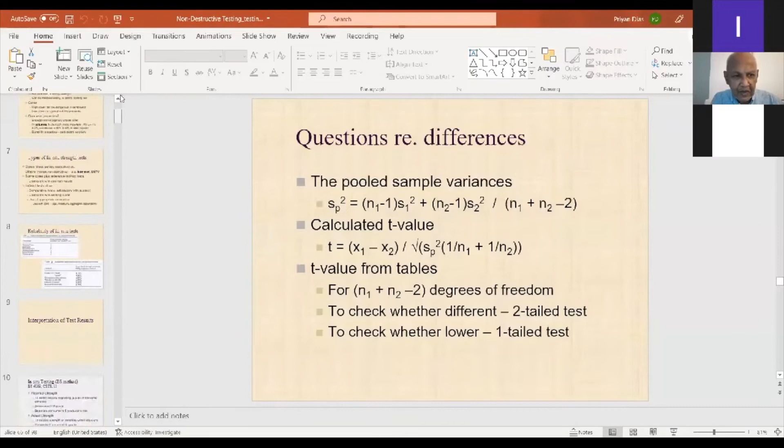So this is non-destructive testing and also assessment, meaning judging, right? This is part of an overall appraisal of structures. Non-destructive testing means the concrete is already in the structure, and you can appraise it at different stages. One very common case is if the cube test failed, as I mentioned in my last lecture, then you look at the concrete in the structure. But if there are changes of use at midlife, or when the structure is very old and you have to decide whether to demolish it or not, then also you can do non-destructive testing.

There are two broad ways of doing this. One is to actually sample the structure and get material properties, which is what I'm focusing on today, mostly with respect to concrete properties, although those concrete properties may not be the most important, and I will tell you about that. Then you take these material properties and check whether they are sufficient, or use those properties to do structural calculations. So that is sampling and testing the material properties.

The other approach is to completely forget about the materials and do some kind of load testing with an expected load, and then see whether the structure is behaving okay. Now, this non-destructive testing requires a lot of interpretation, and it is not as well accepted, there are sometimes disagreements, compared to, for example, something like a cube test.

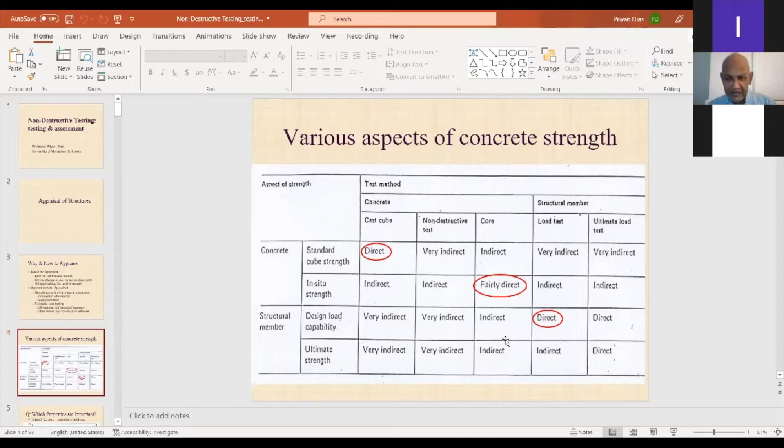Right now, I think some of you who have heard my lectures might be familiar with this slide. Okay, first let me use the pointer.

Now this is a simple slab. Those days we used grade 20 concrete also, and steel FY 460, with these bar diameters and spacing. If all these parameters are at their design values, let us say the moment of resistance is 14.35, and we divide that moment of resistance by 14.35 itself.

So the moment of resistance ratio is unity, with all parameters at these stated values. Now we can change one parameter at a time and see what happens to the moment of resistance ratio.

For example, if you think about the cube strength, instead of using 20, you make it half of that, that means 10 MPa, or you can make it double, that is 40 MPa. So you can see the cube strength has very little influence on the moment of resistance of a slab.

On the other hand, if you change the bar diameter, that will have a huge effect on the moment of resistance of a slab, or the depth of the slab, or the yield strength. So it is the steel properties mostly that govern the behavior of flexural members, especially slabs.

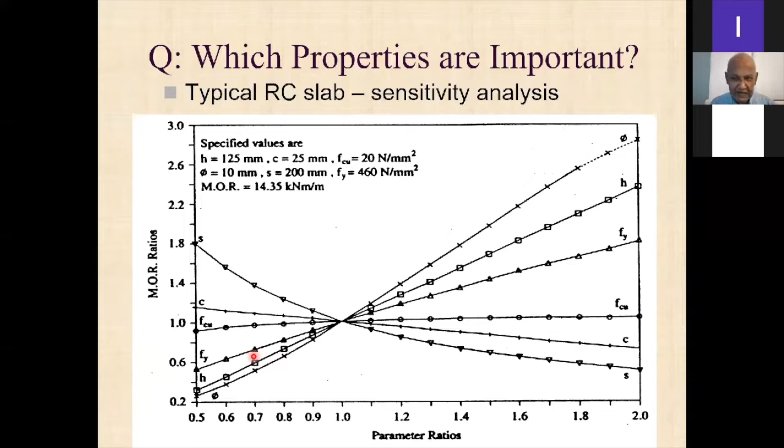Of course, where columns are concerned, the concrete is much more important, because concrete makes contributions of 69% and 53% as your reinforcement ratio goes from 1% to 2%. So concrete becomes much more important there, but much less for flexural members.

So when we are doing non-destructive testing, we should look at some of these other things also, steel properties and properties like cover, because cover will tell us, especially for structures that are mid-age or old age, about the durability conditions in those situations.

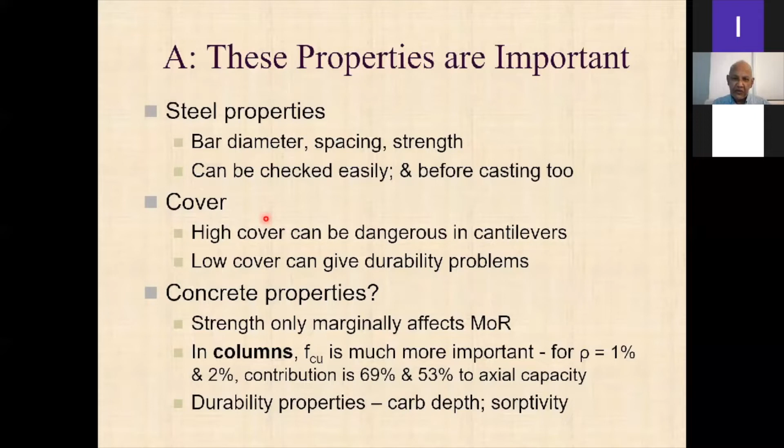So now there are different types of in-situ tests. One is you have cores. The cores are like the gold standard, because you're actually taking the concrete and testing the strength, which is mostly what we are worried about.

But there are others such as the rebound hammer test and ultrasonic pulse velocity, which give us a correlation with strength, so they are indirect tests. One way of doing it is to do some cores plus more indirect tests, and you calibrate with the core test results.

Sometimes many contractors want to get away, especially when the cube test fails, with indirect tests alone. This, of course, I strongly advise against, but in a comparative mode it is okay.

In other words, if you know there is a particular place in the slab where the concrete is satisfactory because the cube test has passed, and another part where the concrete is suspect because the cube test has not passed, you can do a rebound test and compare statistically whether there is a significant difference. I will go through that calculation.

I think some of you, sometimes your companies ask me to do this, or if there are existing cubes that have not been crushed yet, you can think about calibration with that. As a last resort, which I don't generally use now, you can use an existing correlation, because I'll tell you about some of the problems regarding those correlations.

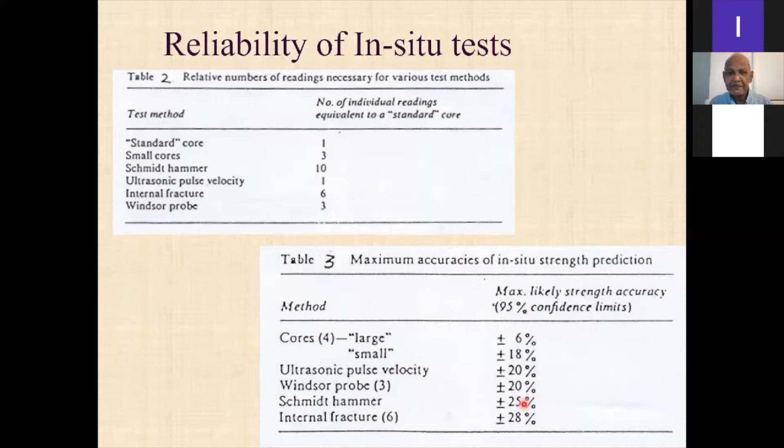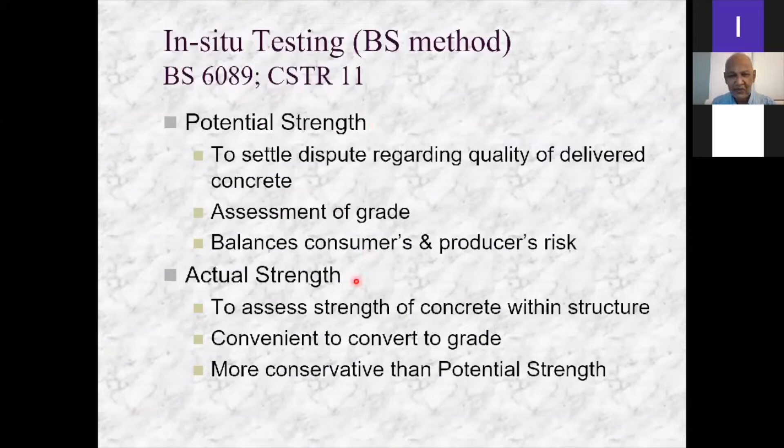Okay, so now we go to interpretation. Some slides have been blanked out because these things were done a bit earlier - Concrete Society Technical Report 11, BS 6089. In those days when you took cubes, there was an idea about potential strength and actual strength. We don't go to that anymore, but this is just in case you want to look at these slides. Typically potential strength means you are comparing the concrete in the structure with concrete that has been delivered. You cannot expect the concrete grade to be the same in the structure as in the cube, because the cube is well cured and tested under lab conditions.

We normally use a safety factor for that also. We know that the concrete strength in the structure is the FCU value divided by 1.5 - the partial safety factor for concrete materials. So if we get, say, 3 cores from the structure, and there is a dispute about the concrete that has been supplied, we take that mean strength - this is how it was done in those days. The new way of doing it is a bit different, I'll tell you that. So the mean strength you multiply by 1.3, and that is called the potential strength. If the potential strength is greater than the characteristic strength, we say the compliance is met. If it is less than 0.85 times the characteristic strength, the compliance is not met. In between, of course, there is some area of uncertainty.

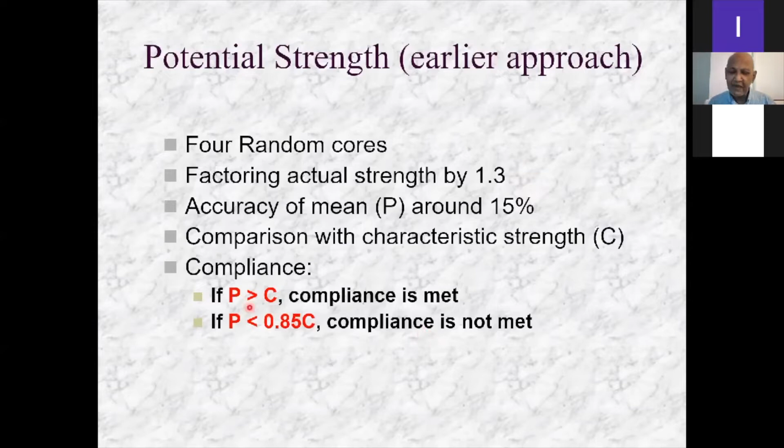Okay, now this is a bit of a different scenario - this is the new Eurocode. First of all, they say that the in situ strength - earlier we had this 1.3 factor, but here it is slightly different. If you take 1 divided by 0.85, you don't get 1.3, you get something like 1.17. So this is a bit more conservative. And it also gives you a table.

So these are the standard grades, depending on whether it is a cylinder or a cube. Let's say this is grade 20 cylinder, grade 25 cube - that's the way it's mentioned. So in situ, you take 0.85 of that. So the grade you expect in the structure is only 17 if it's a cylinder strength, or 21 if it's a cube strength. That is used in the interpretation of these results.

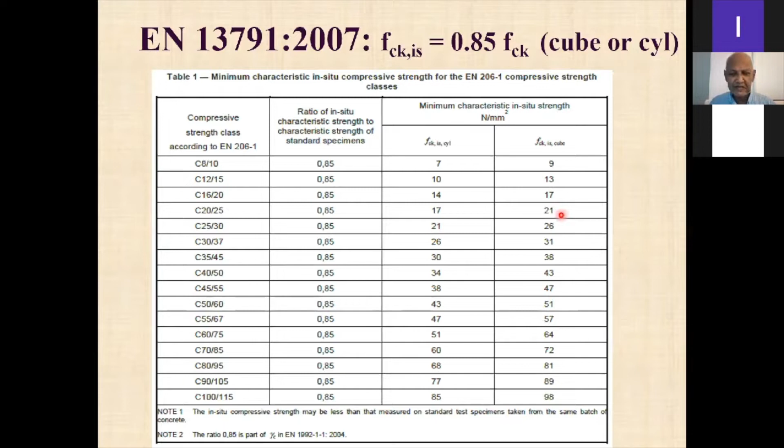So in an old structure, you can either use cores or a calibrated method. If you use cores, you have approach A and approach B. Approach A means you are prepared to take 15 or more cores - very few people want to do that. I remember many years ago we looked at the Puttalam Cement Company buildings, there was a major renovation, and I think we took a lot of cores there, but unfortunately this code was not available then, so we did various other things.

Now, if you have fewer cores, 3 to 14, you can use approach B, but it will be more conservative - you can get a higher in situ grade if you use approach A instead. So if you spend more time, effort and money, you can get a better result. If you use less time, effort and money, you have to be more careful, and the estimated strength will typically be less than if you use the other approach. Similarly, in a calibrated method, we use alternative 1 and alternative 2 depending on the amount of cores or whatever is being used.

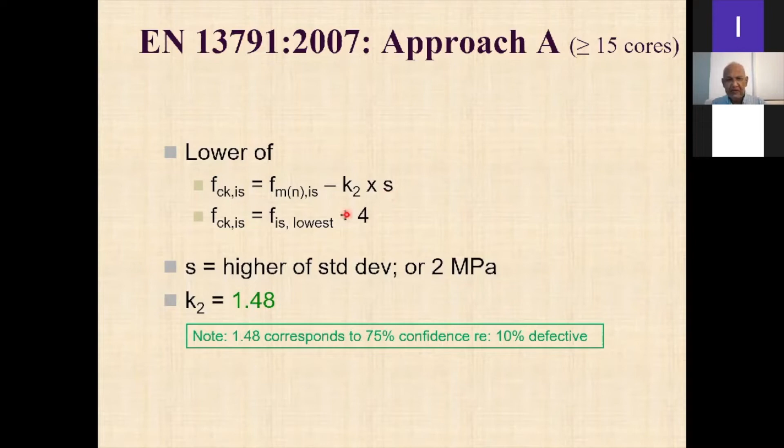And of course, the in situ characteristic strength should be the lower of this one or this one. This S value, you can actually calculate, or if it is less than 2 MPa, you have to use 2 MPa. The K2 value used is 1.48.

Now if you have less than 15 cores, the formula is similar to what you have there. Once again you find the mean strength, and you subtract. Now the standard deviation is not there because there aren't enough cores to find the standard deviation. Depending on the number of cores you take, between 3 and 14, your K value will be very high here, but less there.

So this will be the computed in situ characteristic strength. But also, if the lowest strength plus 4 is smaller than this, then you have to take that one. So, like I have said before, if you take a less number of cores, because of these K values, the in situ strength will be underestimated.

So it depends. You can take a fewer number of cores and get a smaller in situ strength, or you can take 15 cores and get maybe a better in situ strength. It depends on what you want.

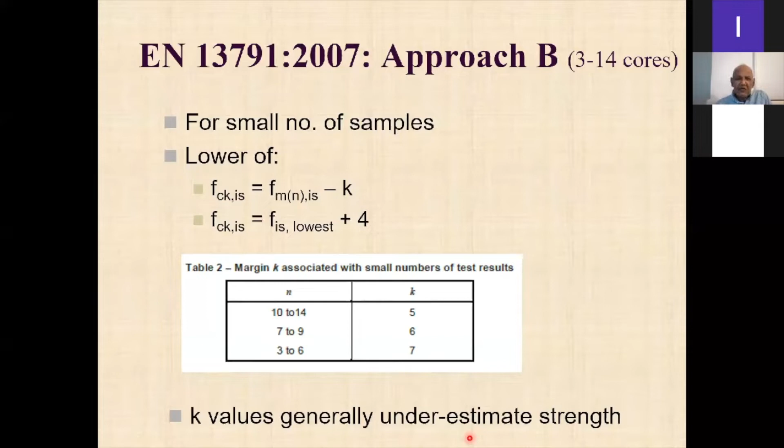Okay, so this is an example. Let's see how we implement this. So this is not a cube test, this is a core from which you get an equivalent cube strength. There's a way to convert that, and I might be able to cover some of that also.

So this is the concrete equivalent in situ cube strength. The core is a cylinder, but you have to convert that to an equivalent in situ cube strength. So you have a series of results here, you can see there are only 7 results. This is the mean, and the minimum is this—out of all of these things, the minimum is that.

Now, what is the in situ characteristic strength of this? It's the mean in situ strength minus 6. Where do I get 6 from? If I go up there, n equals 7, so from 7 to 9, the K value will be 6. So 21.49 minus

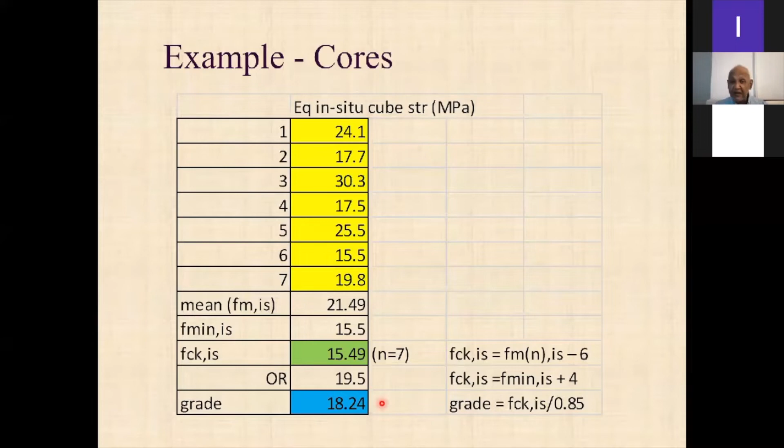Okay, so this is how to get an in situ strength, in situ characteristic strength, and then convert it to a grade in case you want to use it in a design calculation.

Now these are alternative, indirect tests that are correlated with cores. So there are these different kinds of tests that can be done. Here also for the correlation, you have to have not 15 but 18 cores, a large number of cores. So actually this is useful, but to do the correlation we need 18 cores, so maybe not many people might be interested in doing this.

This is where I finished, I think. So once again, you have to follow this, a similar thing as what we had earlier. Earlier, the minimum standard deviation was 2 MPa. Now it is made 3 MPa. But unfortunately, you have to get a regression,

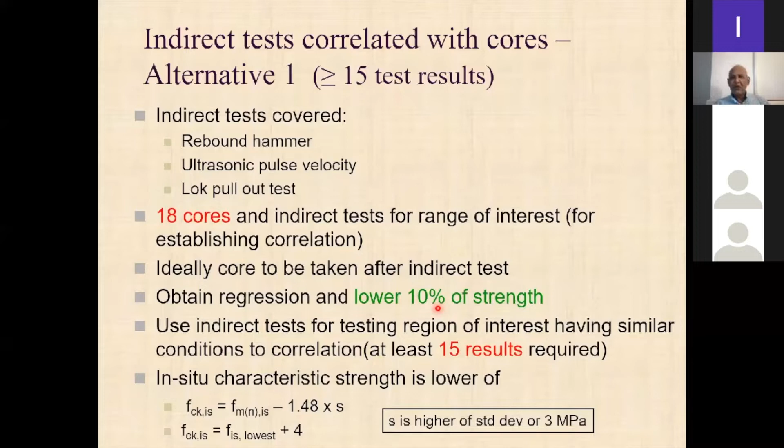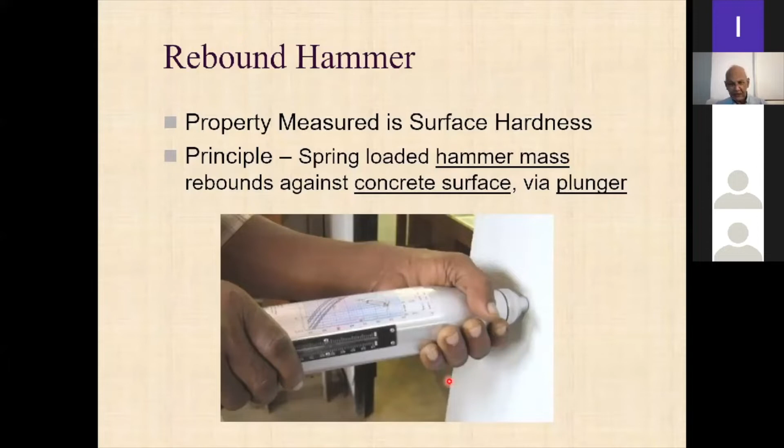Okay, this is how you do the calibration. Right, now before we get to that, I will just show you some straightforward things and these different types of indirect tests that are available. So in a rebound hammer, what you actually measure is surface hardness, you're not measuring the strength.

Typically, you have to take 9 to 25 readings over an area of 300 millimeters by 300 millimeters. Typically, people take about 12 readings.

This result is influenced by the hammer orientation, whether it is horizontal, vertically upwards, or vertically downwards. There are also factors like age, surface carbonation, moisture condition, and coarse aggregate type. All of these things will influence the calibration.

That is why I am not happy when people say they have taken rebound hammer readings and used a calibration chart provided by the rebound hammer supplier. All of these things will be different, right? So actually, you should try to ensure that the surface is dry.

But then, of course, you have to look at things like how old the concrete is, what the coarse aggregate type is, and the hammer orientation. The difference, of course, we can rely on what the rebound hammer supplier says, but everything else will be different.

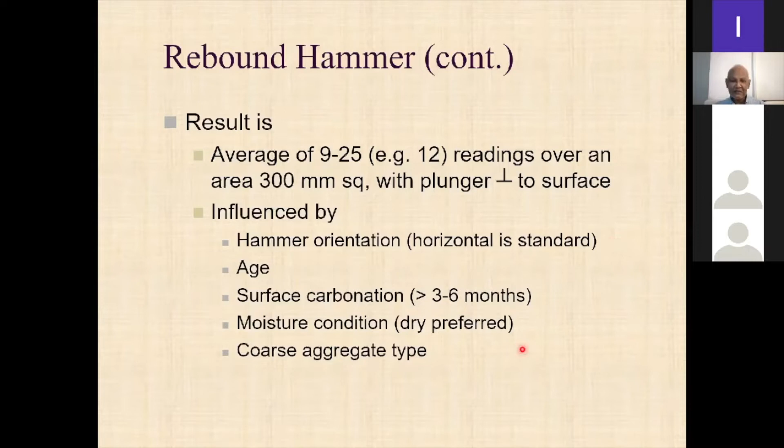So now let me give you an example. This is from the early days, many years ago, when I just started off at Moratuwa University. We did rebound number versus cube strength just to see, and this is published in The Engineer. You can see that the cube strength varies with the rebound number.

Now it so happened that I thought you should have a straight line like this. Now I will show you what the Eurocode correlation is. It's not a straight line.

But the other thing I want to show here is that we had some cubes that were wet and some cubes that were dry, in order to get a bit of a spread of strengths also. Now, this correlation line is drawn only between rebound number and cube strength for the dry cubes.

Now, if you take the wet cubes, they have a range of strengths, but a very small range in rebound number, and the rebound number is fairly low also. Which means that strength has no effect on the rebound number in this case.

So the story from this is, if you are taking rebound hammer readings, you have to ensure that the surface is dry. If it is a wet surface, then the rebound number will only be a reflection of that wet surface, the hardness of which will be reduced because of the moisture.

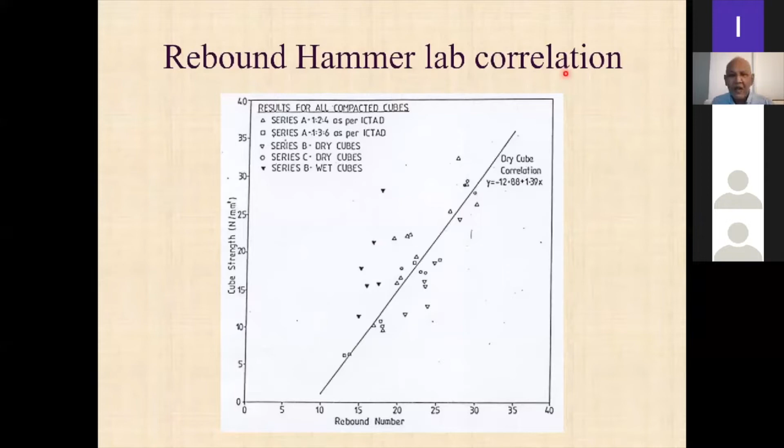Now, here you do in fact find a straight line in the Eurocode. There's a slight change here, the inclination changes slightly.

So what we are doing is, if we are getting a correlation between rebound number and strength, we have to get that correlation using 18 cubes, and we have to find the difference between each one of those points and this line, so that we draw a line that is parallel to this. We cannot draw a straight line just using these points.

You might think that we get a set of points here and just draw a straight line through that. No, you cannot do that. The code forces you to maintain this slope, this shape. That is the idea behind the correlation between this indirect test and the strength.

So your age, your carbonation, and all of those factors will be different. That's why it's encouraging you to do this correlation, but this shape is only shifted vertically by a set amount. This slope remains constant, this slope remains also constant.

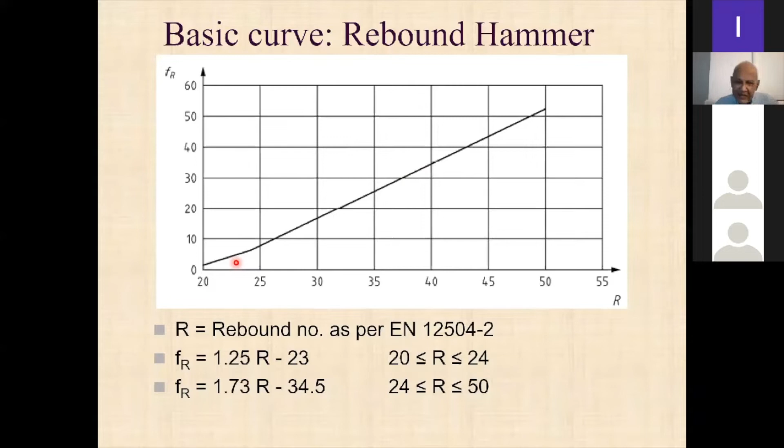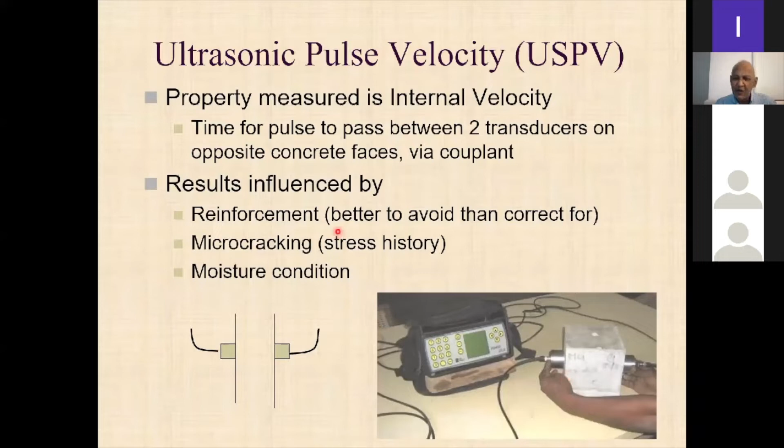Now, where ultrasonic pulse velocity is concerned, you have these different things, and the pulse passes between two transducers. So the results are influenced by things like reinforcement, microcracking, and moisture condition, and the moisture condition is very important.

Now, in those days, people thought that the relationship between strength and this pulse velocity was given by this logarithmic expression. So pulse velocity is on a natural scale, and cube strength is on a log scale.

So this is from a very old paper, I think, not one of mine. Let's say you have a wet cube strength here, and concrete gets put into a structure. So the actual core strength will be here. There will be a drop in strength because we cannot expect the strength in the concrete to be actually the strength that is in the lab. So there will be this drop in strength because of that.

But separately, if you do a lab correlation, you will get something like that. And this loss is the pulse velocity difference from the strength loss. In other words, this is the lab value, and this is the strength in the structure. So that pulse velocity loss is because of the change in strength.

However, in the structure, now when you do the pulse velocity, you are doing it under moist condition, so the pulse will travel fairly quickly through the moist concrete. In the structure, especially if it is something like 12 or 15 years old, you will have very old concrete, and I am assuming you're doing it when it's dry. So then there will be a loss in the pulse velocity because of the desiccation, because the water is not there compared to what you have here. So this is called the desiccation line. I think this is from an early paper from a fellow called Thompson.

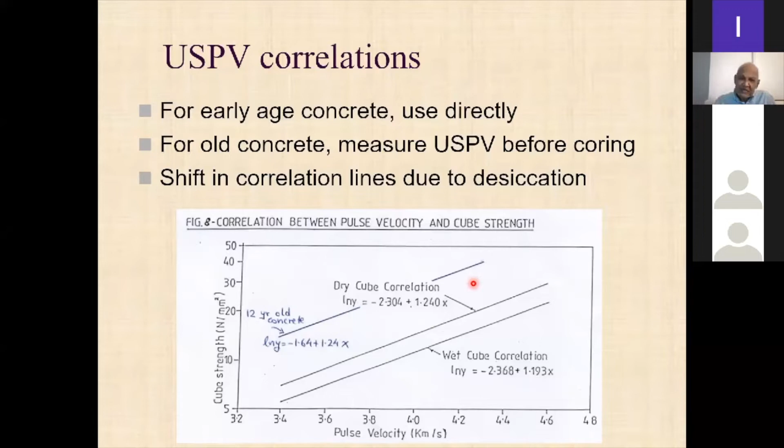I cannot entertain questions on these very detailed things, but hopefully things will get clearer when I do some examples. So like I said, this is the basic curve. So when you get these correlation lines, you cannot move away from the shape of the basic curve. That is the main story here. And this is for the pull-out force, which we don't do very much.

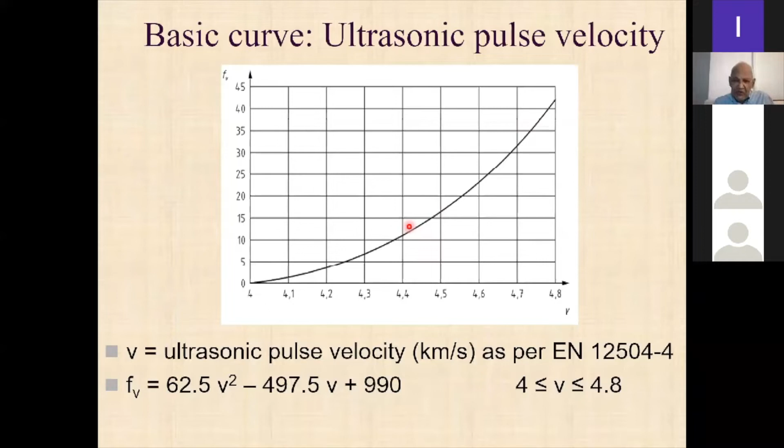Okay, now when I do the examples, I will give you examples of these various things. Now this thing I covered in my earlier lecture also - if there is a dispute on cube test results, if you have 15 or more core test data, then your in situ mean strength should be greater than or equal to 0.85 times characteristic strength.

Let's say if it's a grade 25 concrete, then you find the standard deviation from this. Then the in situ strength should be greater than or equal to this value in order to accept the concrete. And in addition, the lowest in situ strength that you get should not be lower than this. Then you can say, well, the concrete that was delivered by the supplier, in fact, has this FCK value.

Now, suppose you have 15 or more indirect test data and 2 cores taken from the lowest strength areas. So what you do is you do, let us say, 15 rebound hammer tests. You take the 2 lowest rebound hammer values, take those areas. Take 2 cores, 1 each from those 2 areas. Then the lowest value of the in situ strength.

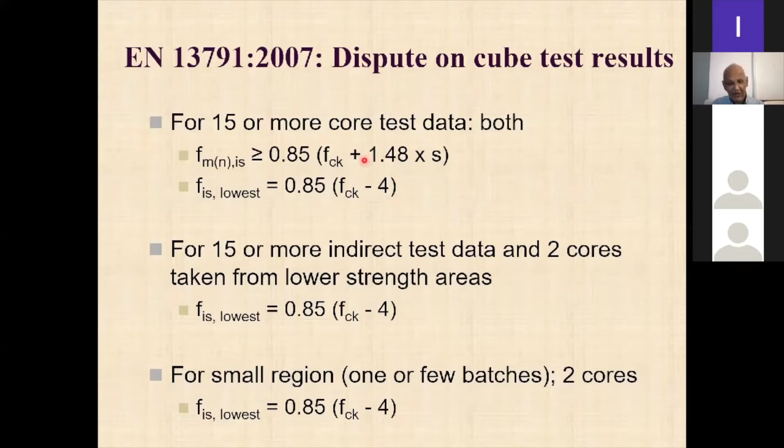But of course, if you have a widespread area where the cubes have failed, then you might have to go to something like that, or even something like this. Now I'm going to give you some examples, and these examples are wide ranging, so let's see whether we can finish. I don't know, I better not ask questions because there are a whole number of you who have joined, and then it will be unmanageable.

Two sets of results for some reason, I can't remember that now. Anyway, so even for a small supply of concrete, your average must be greater than 25, so which is not satisfying.

I think I know what this is. I think this is three cubes from one batch and three cubes from another batch, so this is the variation within each of those two batches. So the minimum should be greater than 0.85 times 25. That is a thing given in the SLSI, by the SLS standard.

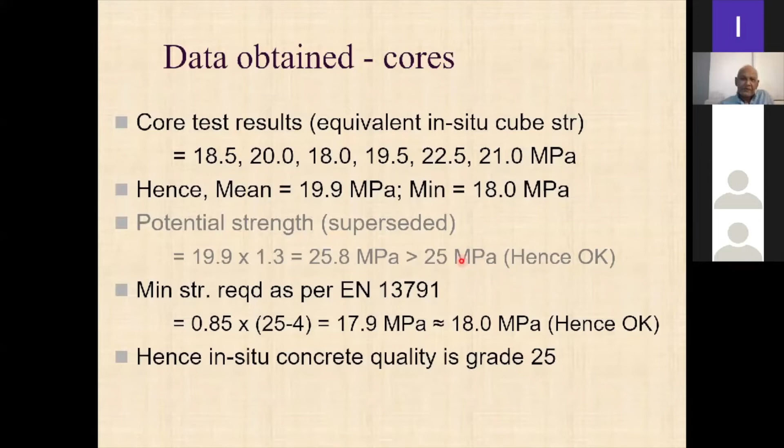Okay, I'm going the wrong way, right? So, yeah, okay. So this is in summary, but I showed earlier as well, right?

Now, if we look at core testing, these are some slides on core testing, right? So these are repeating sometimes what I said earlier. For approach A, you need more than 15 cores. Approach B, 3 to 14 cores. If you have a concrete dispute, at least 2 cores you will need, right?

So minimum diameter of 100. If your thickness of the slab is less than 100, then you have to use smaller diameter cores because your length over diameter ratio must be greater than 1. But if you use smaller diameter cores, your variability will increase, so generally you need more cores, right?

Okay, so you can do visual examinations and things like that. And those days, once again, Concrete Society technical report required you to quantify these voids. You can still do that. I mean, that's good practice, right?

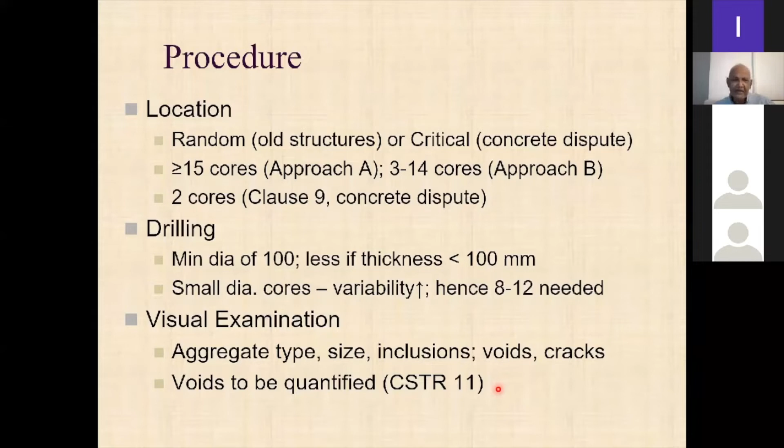So trimming and capping, this length upon diameter ratio should lie between this. Because we are converting to cube strength mostly, it is better if you have length upon diameter close to 1 but greater than 1, right?

So you can either do trimming or capping, high alumina cement mortar or sulfur sand. I know people use plaster of Paris sometimes, but then some of those you have to use these correction factors, right?

So it is better that you get all of these results also, density, compression testing and all of that, because once you take a core, you are in a sense disturbing the structure. It would be a criminal waste not to get as much information from that core as possible.

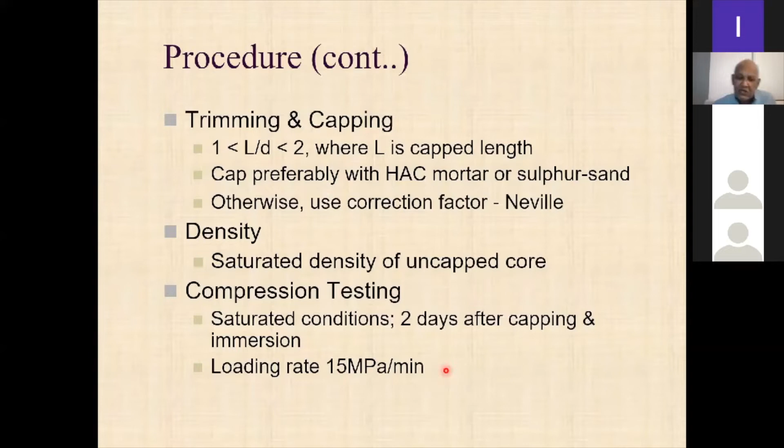Okay, so I will tell you more information again. This is only about the concrete, but even more you can, right?

There are ways to convert that in order to get the equivalent cube strength, right? Now, also the direction of drilling is important, right?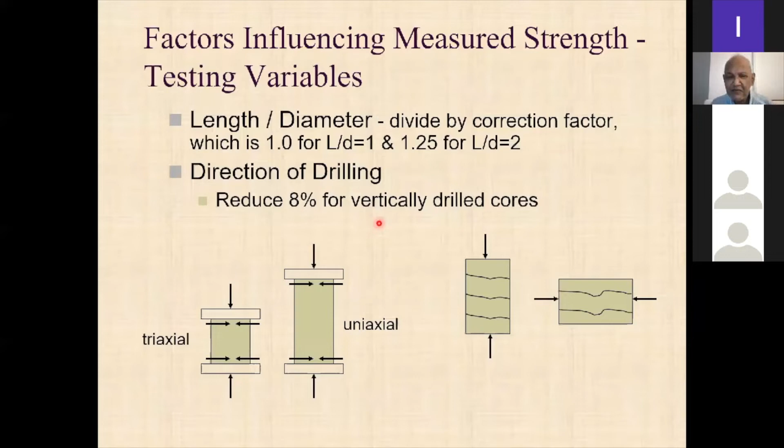And this is for correcting for embedded reinforcement and things like that. I'm not going to go into all of that, right? Okay, and I'm going to skip this also.

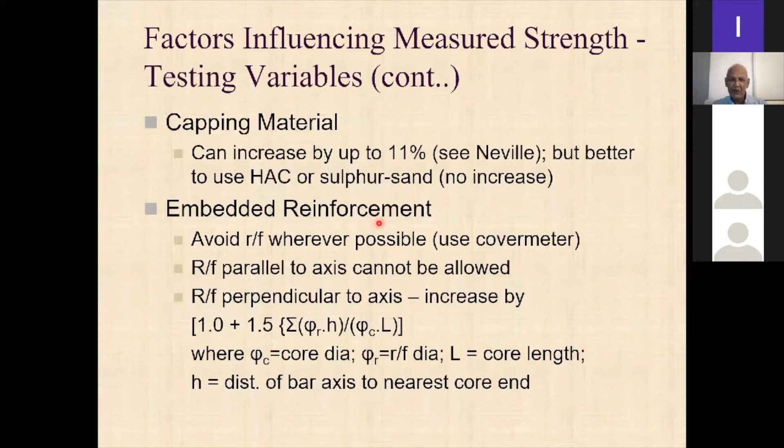Now, if you want 95% confidence limits, you can say it's plus or minus 12%, right? We don't really use those very much if you use cores directly.

Right now, like I said, once you take a core, try to do all of these things in the core, because if you are doing an actual structural assessment, by the time the structure is in midlife, you're not worried about the concrete quality and whether the contractor supplied you the correct concrete. You're worried about whether you can do some calculations and see whether this structure, which was normally used as an office building, if it is going to be used as, let us say, a storage area, whether the concrete and the steel properties are sufficient for that.

So you may also be worried about durability. You measure the depth of carbonation, measure the element thickness and the cover. If you measure the element thickness, you can get an idea about the actual depth of the concrete. You may even, with some judgment, be able to reduce the partial safety factor for dead load, because you now have a very accurate estimate of the element thickness. But that requires some expert judgment.

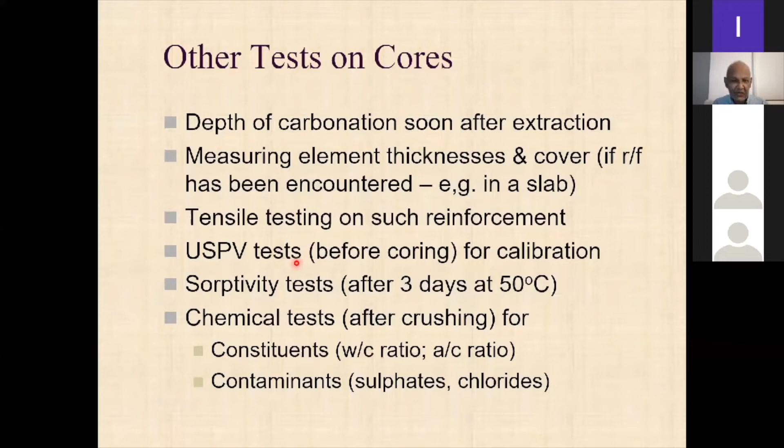And there are these other tests also that can be done. So these are some tests for durability. I'm going to skip the ones that have no direct influence on in situ testing. But cover to reinforcement is very important.

In addition to information about durability, the cover also tells you something about the lever arm of the slab or something like that. And the cover to the reinforcement, the cover meter can be used to locate where the reinforcing bars are. Because, once again, if you remember that first slide I showed about the moment of resistance ratio, the bar diameter and the bar spacing have a big effect on the moment of resistance. So even if you use the correct yield strength, even if you use the correct bar diameter, instead of spacing at 150 millimeters, if you have spaced at 175 millimeters, then the moment of resistance will reduce. And using a cover meter, you can get the spacing of the reinforcement.

So for depth of carbonation, you also have to spray as soon as you take the core on a freshly cut surface, which is a core surface.

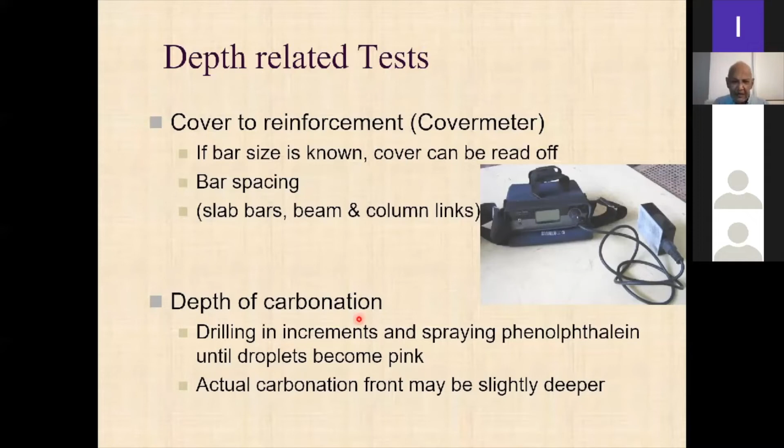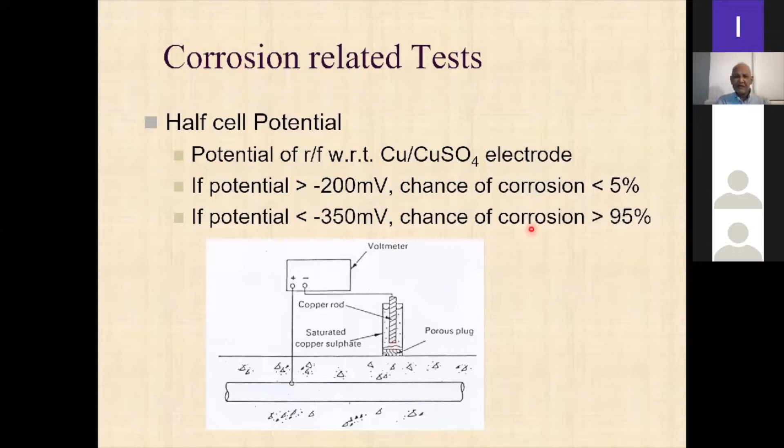You have to get the depth of carbonation, right? So half cell potential - this is a particular piece of equipment that can be used. So there's a potential between this copper sulfate electrode and the reinforcement. You have to connect it to the reinforcement like that, and depending on the potential, you have different chances of corrosion.

Then you can do what is called a resistivity test. Here you supply a current and then measure the voltage, and from that you can get what is called the resistivity in ohm centimeters. If it is less than this, corrosion rate will be very high. If it is greater than that, corrosion rate will be very low.

So the basic idea is, if your concrete is very dry, and if you are confident that you can maintain it at that dry state, then even though your depth of carbonation has gone past the reinforcement, you don't have to worry so much, because the resistivity is high and the corrosion rate will be quite low.

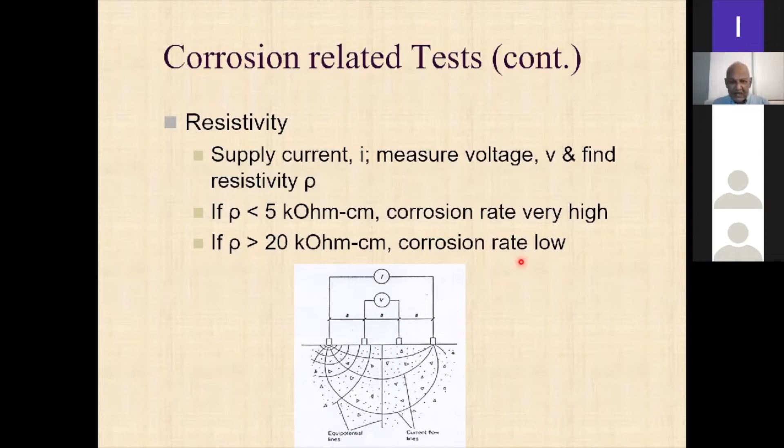These chloride levels and sulfate levels - this is if you are doing some chemical testing. Sometimes this is important for an existing structure, if you want to see what is the risk. Let's say a structure has been close to the coast for about 25-30 years. You can get, at different depths, what the chloride level is. Up to 0.05% by weight of concrete is low risk, greater than 0.15% is high risk. And these are the values for sulfate.

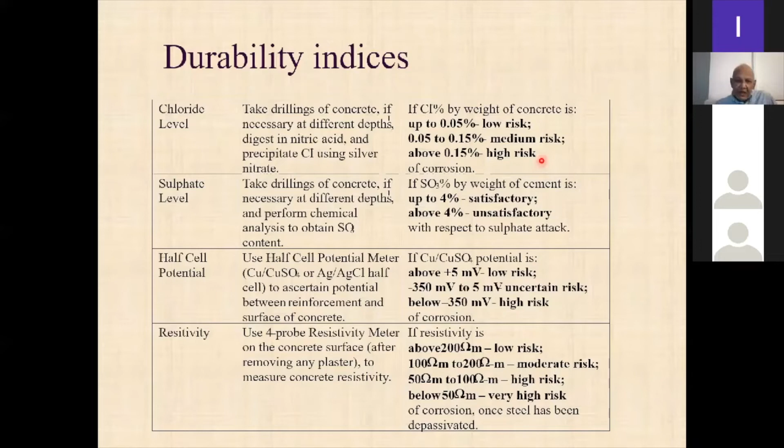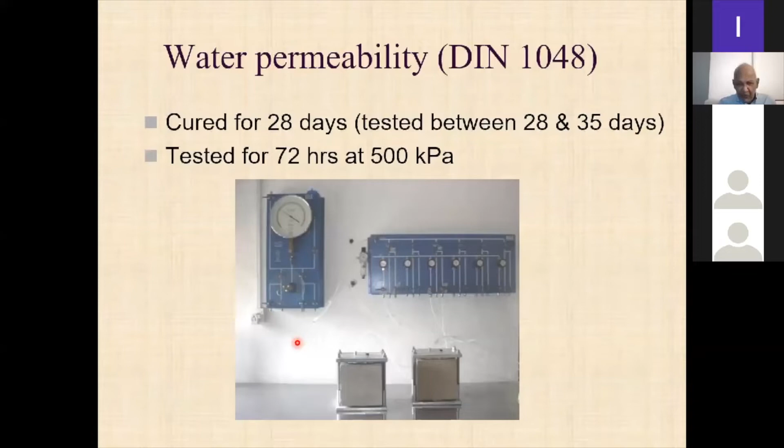So we can do this water permeability test. That is not so much an in situ test, but more to approve the concrete before it is used. So these are some results.

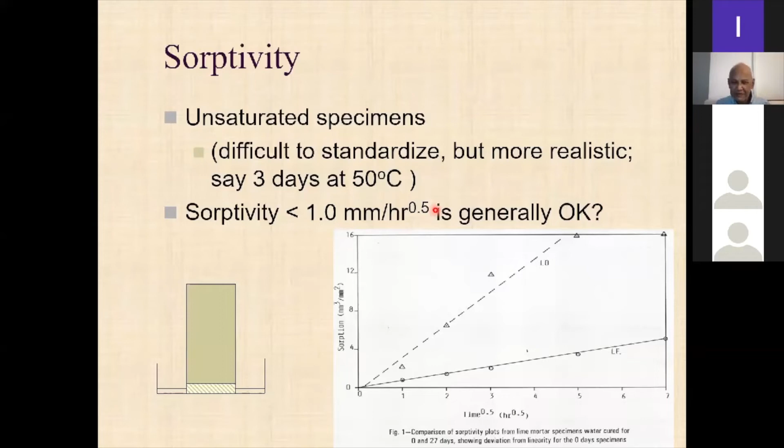Sorptivity we can do on the core itself, but there isn't very much guidance on which sorptivity values are acceptable. Maybe there is more recent literature on this, but typically these are the values that we used to use earlier. I will not go into details of that.

Full-scale load testing - you can have either in situ non-destructive tests, or if you can actually remove a member or precast members, you can test it to destruction.

You should not carry it out before 28 days of age. You must have scaffolding, both so that you can mount dial gauges - because the load testing is actually measuring load versus deflection - and also, by some chance, if there is a failure, the scaffolding should be able to catch the elements with a minimum drop. When you read these gauges, it's better to read them remotely using a telescope in case there is some kind of unforeseen accident.

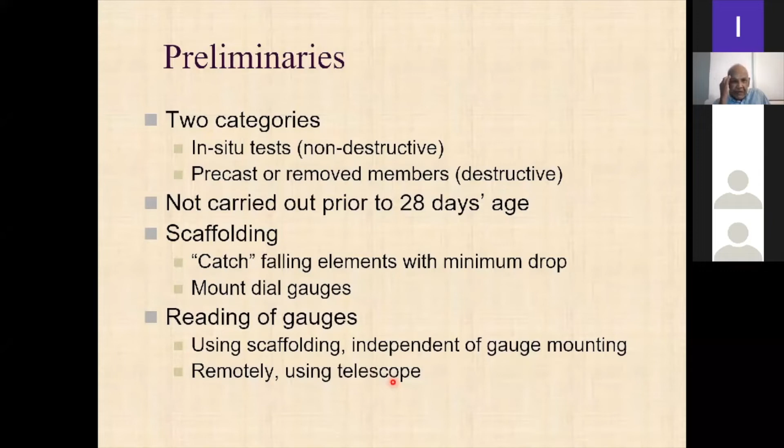So the objective is to ensure that the element is in the elastic range and to ensure that the member experiences the required loading. In other words, if you are testing a beam, there will be slabs, and you have to load the beam as well as the slabs on either side. Even if you don't load the slabs, if you load a beam, the slabs will take part of the load to the other beam. So you need to be able to assess what is the actual load coming on that beam.

Then when you are applying the load, you should eliminate arching action. For example, if you are using sandbags, sometimes the load may not go directly vertically, but may arch across the sandbags like that. So there are various details - I can't go into all of those.

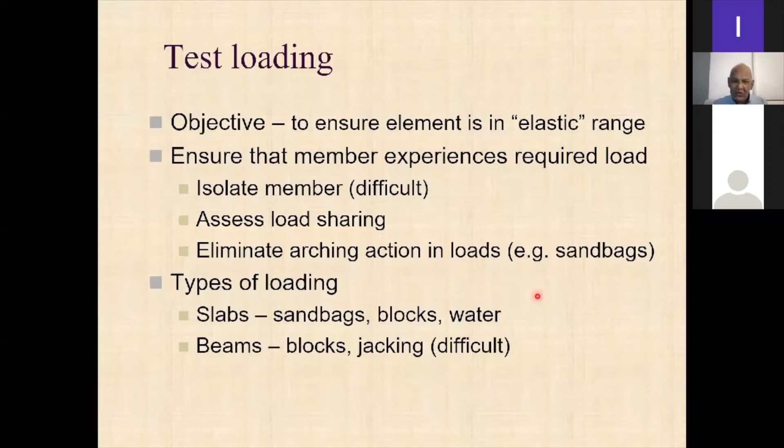If you want to get the design strength, you use dead load plus 1.25 of imposed load, or 1.125 of dead load plus imposed load. You apply the load and remove it incrementally. You have to do two tests with one hour in between, and you can consider a third test with the load left for 24 hours. The acceptance criterion is the percentage recovery of the second cycle.

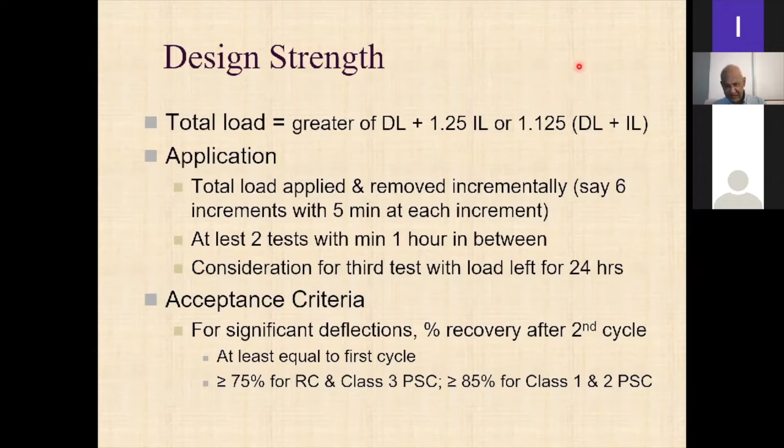So you have a loading and then you unload, and you get what is called the percentage recovery. The percentage recovery after the second cycle should be at least equal to the first cycle, and it should be greater than 75% for RC and Class 3 PSC, and 85% for Class 1 and Class 2 PSC. So if this is deflection and that is load, you load it and then unload it to see whether it is in the elastic range. That is why the recovery has to be at least 75%.

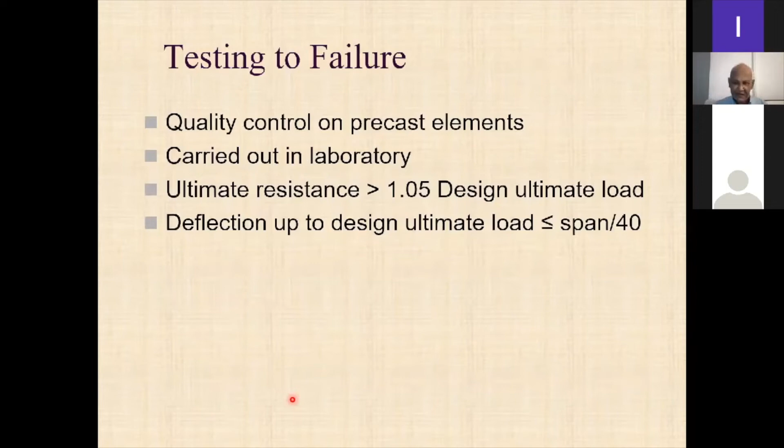The other approach, of course, is to test for failure, but this is typically used for precast concrete elements. Now, a few more case studies. I think this result I have already shown you.

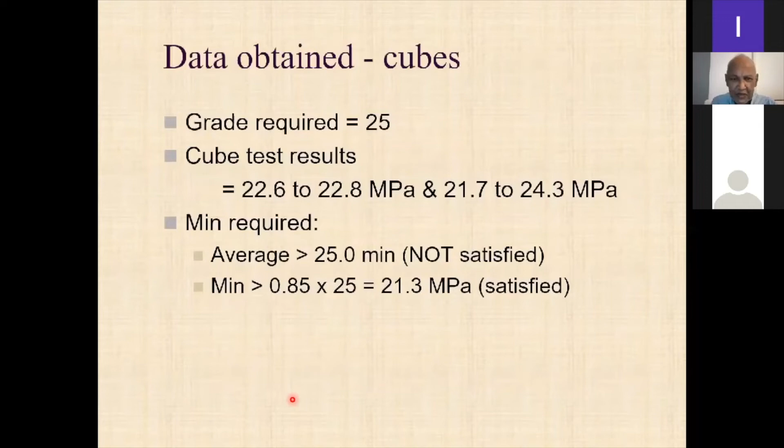Now let me spend some time on the rebound hammer, because it is a test that many people want. It's an easy test to perform, provided you perform it in this comparative manner, comparing satisfactory and suspect concrete.

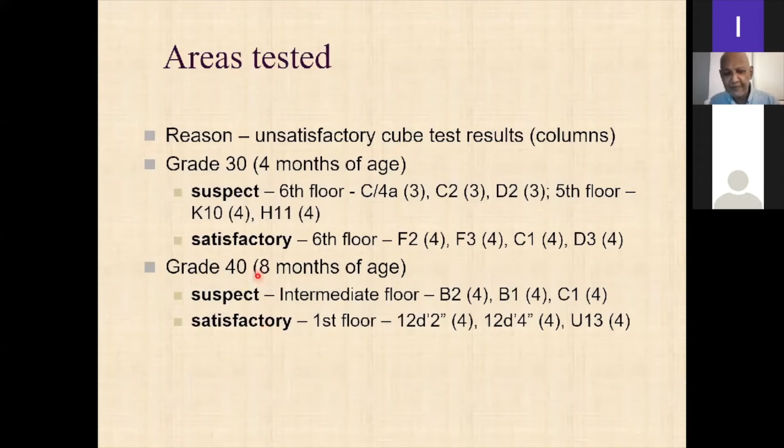So you had grade 30 concrete at 4 months of age, grade 40 concrete at 8 months of age, which is not very good because after 6 months there is sometimes too much carbonation. Anyway, what we want to compare is suspect versus satisfactory. So for grade 30 also there was suspect and satisfactory, and grade 40 also had suspect and satisfactory. These were in different parts of the structure, so you have a list of suspect readings at different locations, and different locations where you have satisfactory concrete.

You don't actually need the same number of readings either, but you need about typically 15 to 20 readings, though maybe you can manage with about 12. It just depends statistically on whether it makes sense. Here you have less because there's less area with grade 40 concrete.

So you get the means, then you get the standard deviations, then you get what is called the pooled sample variance. It's there in the next slide. So SP squared is n minus 1 into S1 squared plus whatever.

Then you calculate the t value. The t value is this mean minus this mean, satisfactory mean minus the suspect mean. Now actually here, your satisfactory mean is less than the suspect mean, so then you're okay. Here, of course, your satisfactory mean is greater than the suspect mean.

Now the question is, is this difference statistically significant or not? That is what you want to determine. So you get this pooled sample variance, and then you get this t value, and here also you get that same t value. So the t value is an indication of the difference of the means.

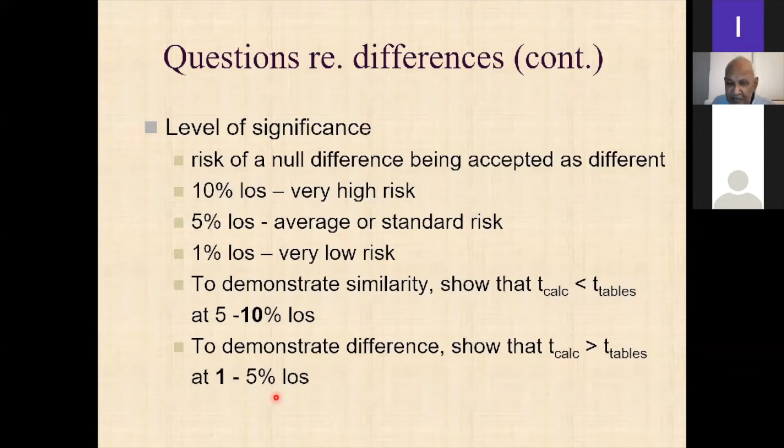Now, instead of using a 5% level of significance, if you use a 1% level of significance, and if your calculated T value is even greater than that, so you can measure T from this way to that way, or T from that way to that way. We're not worried about the sign. So if your calculated T value even is beyond this 1%, it means that it's definitely different. It means that there is definitely something wrong with the concrete.

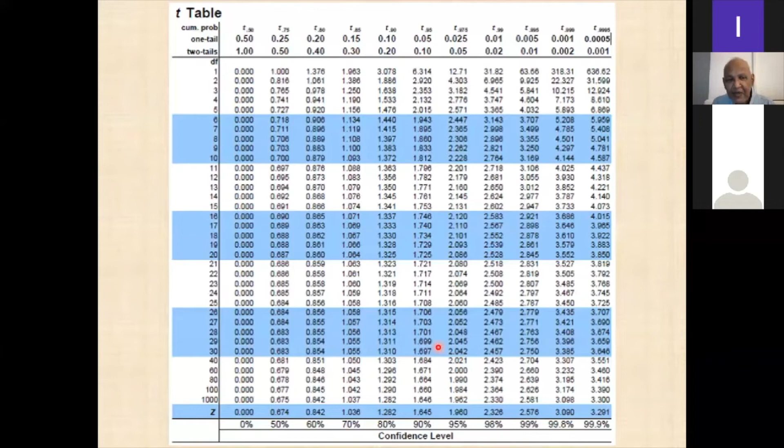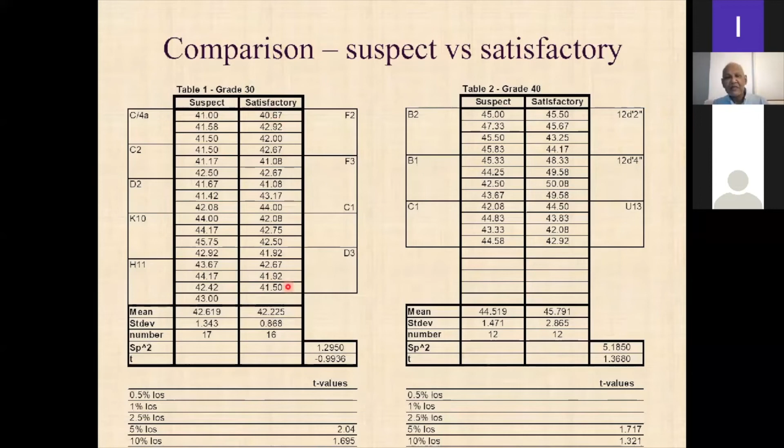So the concrete is suspect, right? The reason why we say this is suspect and satisfactory is because the cube tests failed here. Here we are going into the structure to see whether the concrete in the structure, which is supposedly suspect, and the concrete in the structure, which is supposedly satisfactory, whether there is a difference between that or not. So this is the kind of way that you can use rebound hammer testing.

The testing is fairly straightforward, easy to do, not much expense. The analysis is a bit complicated, and you have to get your head around that analysis. When you're doing it, of course, you have to make sure that both the satisfactory and suspect area are definitely tested. The comparative satisfactory area must be of a similar age and, of course, similar grade to the suspect concrete.

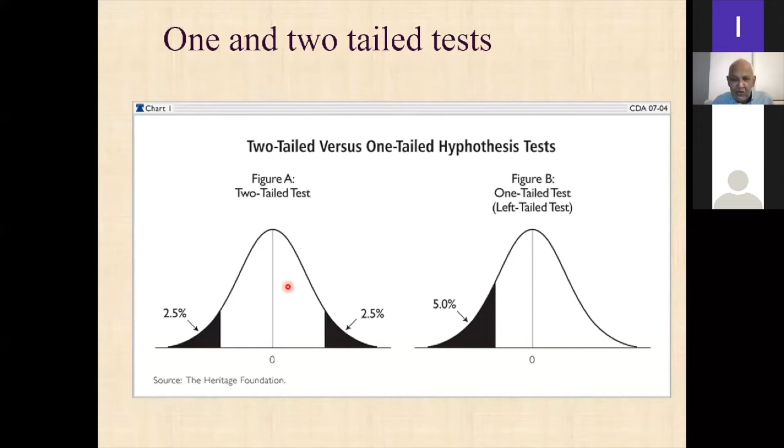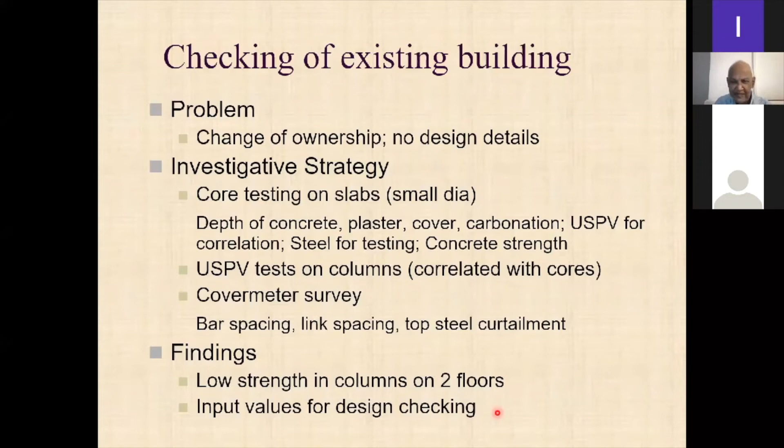So okay, now I'm going into another area, which is midlife assessment. So this is where change of ownership is concerned, no design details. There were various strategies that were used, and actually the findings were that the column strength was a bit low on 2 floors, and we found some input values for design checking that was done by the State Engineering Corporation. But anyway, so these are the cores. So these are the typical kind of values that you can get.

This is the depth of the top plaster, bottom plaster, and the actual concrete slab. You can see the variation of concrete slab thicknesses. Then the carbonation, cover to steel, if we have drilled and cut through the steel, then of course the pulse velocity. All of these things you can get from cores.

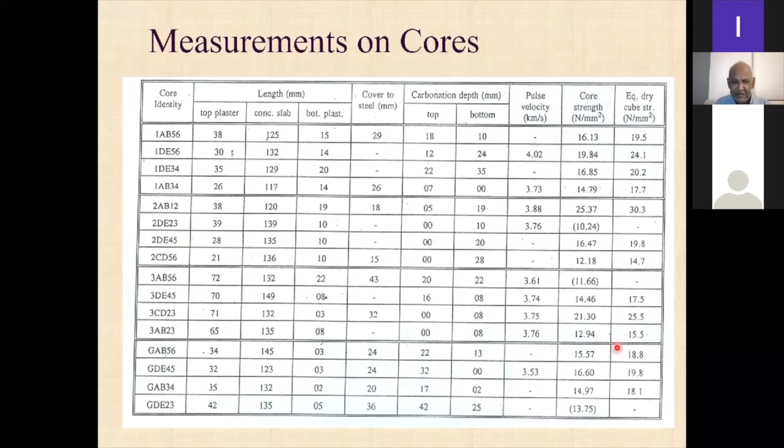Now the columns, I think we did not take cores. We used ultrasonic pulse velocity and correlated it with the cores that we got from the slabs.

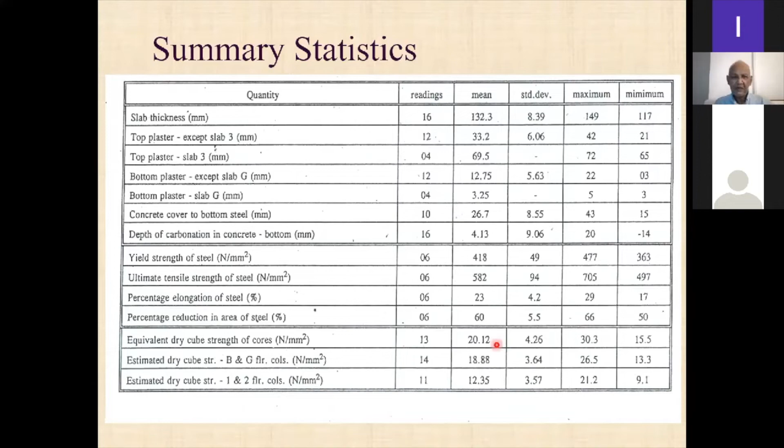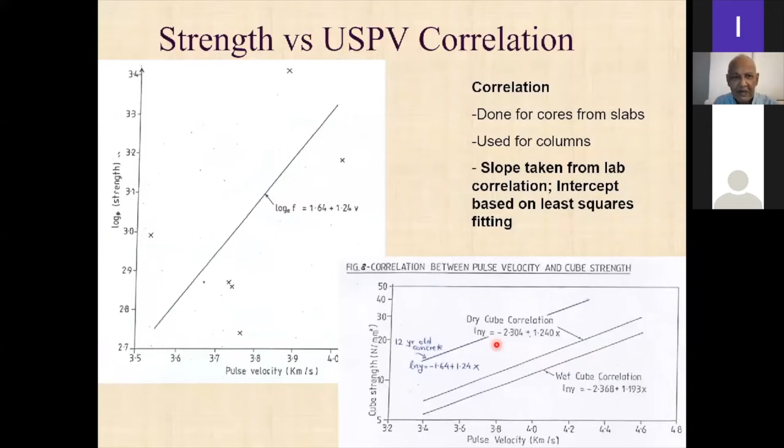Okay, right. Right. Okay. Right now, this is something that I highlighted earlier.

So this is the pulse velocity here. I gave you this method, right? This is the equivalent cube strength, so this is for correlation. Normally we need 9 cores for correlation, but I'm just going to manage with these 7 for purposes of explanation. So this is the mean, this is the minimum.

And if we want to get from these cube strengths alone, this is the same one that we had earlier, and this is the grade that was estimated. Now we are trying to test a much wider area using pulse velocity, and we are trying to get a correlation between these cube strengths and pulse velocity taken at the same locations.

First I want to say that I am just demonstrating a simple correlation between this and this, using this polynomial recommended in the Eurocode, and using this logarithmic relationship which I said was used earlier. It'd be difficult to get good R-squared values, but at least you get a slightly better R-squared value for this polynomial compared to this logarithmic one. So basically I'm agreeing with the Eurocode, even though this is something that we used earlier.

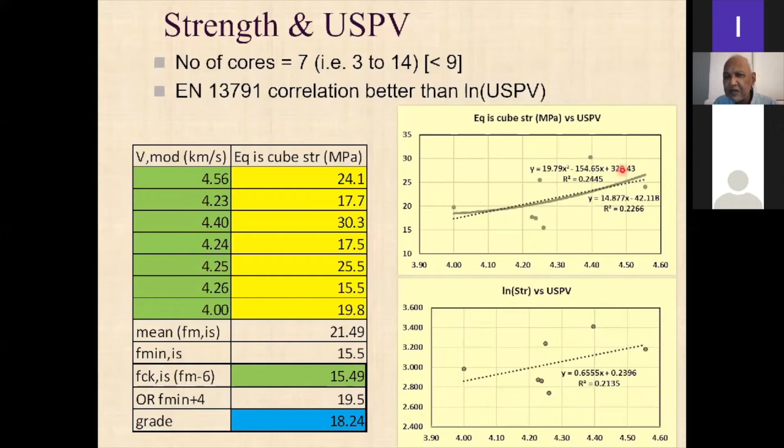But you're not allowed to do that. You have to put this factor there and that factor there, because that is only what will make it parallel to this basic curve. So you get this difference and you do it, but then again you have to reduce this one from that, so actually I will not go into that.

But from that, there is a way that you take that standard deviation and reduce it to this actual correlation curve which you get here. So it is all given in the code of practice, and with a little bit of thought and care, you can get there.

Getting close to the end. So this is the condition assessment for a 70-year-old building. I'm just telling you the different kinds of tests, giving you a flavor of the different kinds of tests.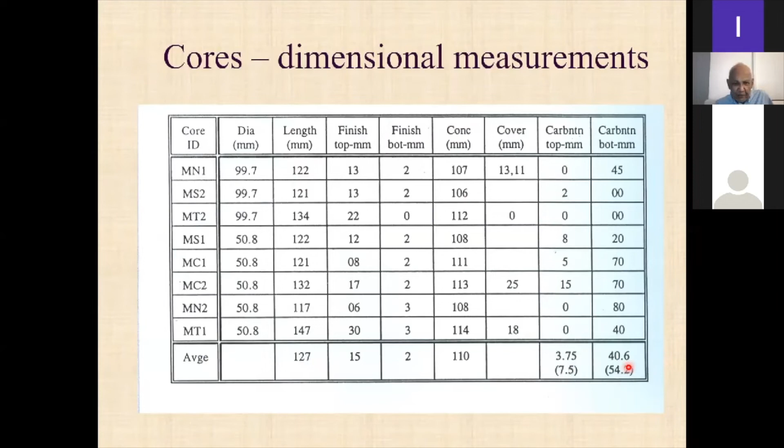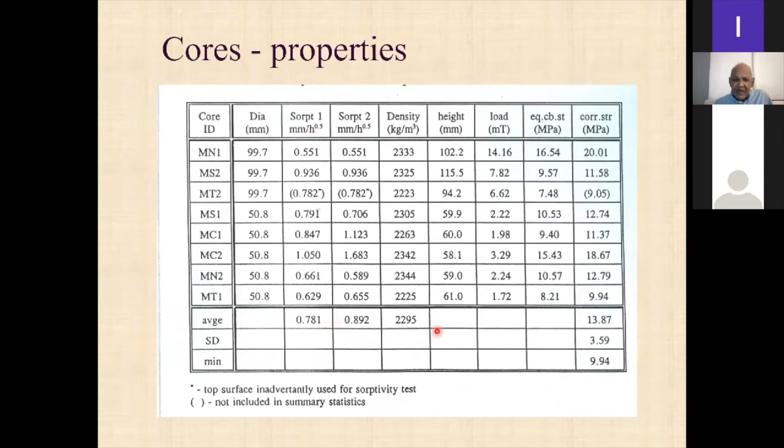Now here also you get carbonation at the top and carbonation at the bottom. This is just to highlight that in most structures, carbonation at the bottom will be greater. And these are some other properties that were done - sorptivity. I said if the sorptivity is less than 1 millimeter per square root of hour, then it's generally okay.

And this is how you do the sorptivity test. You have a sponge here. You heat this at 50 degrees centigrade for 3 days, and you calculate the amount of water absorbed into that semi-dry specimen - not completely dry, but dry to a standardized sort of condition.

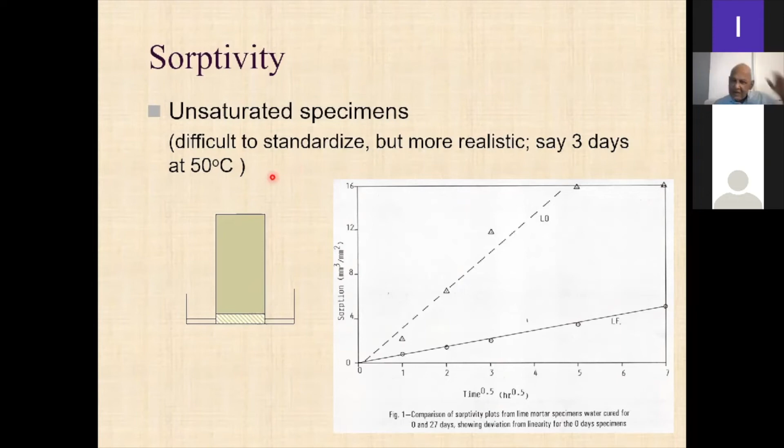I have not explored this in great detail, but very often the top of the concrete has a thicker rendering, while the bottom of the concrete has only a small sort of soffit plaster.

So in order for the concrete to get carbonated from the top, all of this rendering also has to get carbonated. Separately, most of the slab is probably in sagging mode, and therefore at the midspan of this slab it is in tension, and something in tension will allow external agents to penetrate more easily. This is just a theory, but typically you find that carbonation depths are greater at the bottom of these concrete slabs.

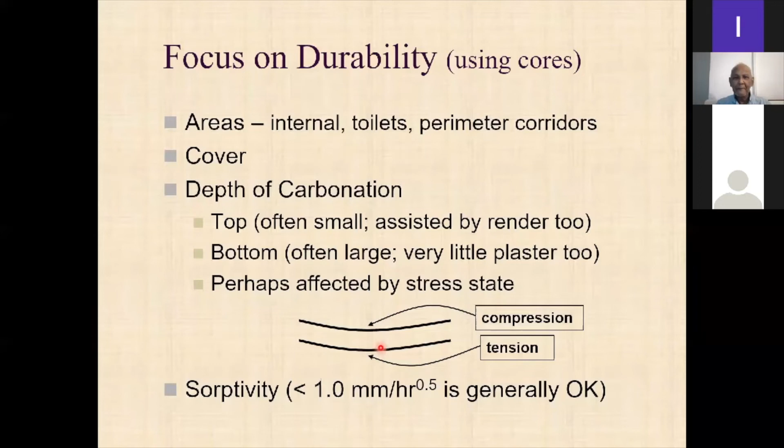So in this particular project, we found that carbonation exceeded the cover. Significant corrosion was present only in moist areas, typically areas you have to be particularly careful of, like toilets and perimeter corridors. So very often what you have to do is some repairs there, waterproof it, and try to keep it dry.

Now this is a 100-year-old structure. Before I talk about this structure, we had an external examiner at Moratuwa called Professor Tim Ibell, and he has written an article in the Structural Engineer Journal called 'Nothing is Better Than Something.' I think most of us will think that something is better than nothing, but he has written a very provocative article called 'Nothing is Better Than Something.'

Now that is because he and many other structural engineers like him are very concerned about the carbon contributions by the industry, carbon dioxide emissions. So he is suggesting to structural engineers: try to keep these old structures going, do not demolish them, because if you demolish, that means you have to put up a new structure. And while doing that, try to maintain your structural engineering practice as well. So you have to think a bit carefully about what kind of value you have for clients, even if you are telling them not to demolish and reconstruct. So it's a bit of a challenge for structural engineers.

Anyway, speaking for myself personally, I like these older buildings. I think they add to cultural heritage and things like that. So as far as possible, it's better to try and maintain them.

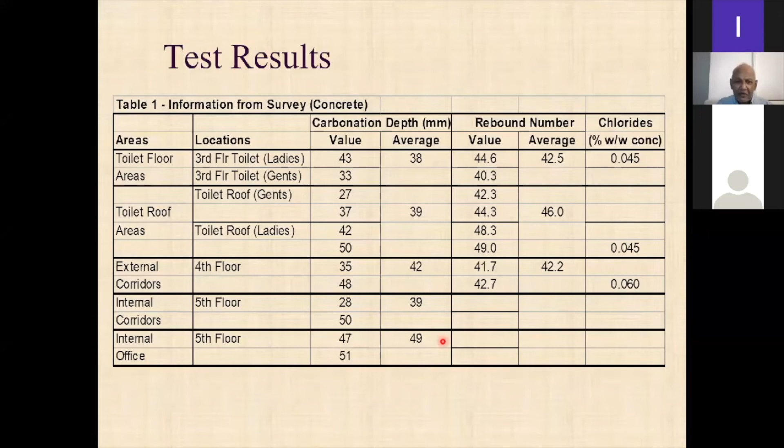So this half cell potential and resistivity - half cell potential varied between these two numbers, and here it varied between these two numbers. I think if it is less negative, as I had in that slide earlier on, then the risk of corrosion is not so great. Resistivity is certainly greater than 20 kilo ohm centimeters, so once again, probably because the slabs are quite dry.

And so basically we gave a recommendation not to demolish the structure. The question here was, is it safe? Do we need to demolish this?

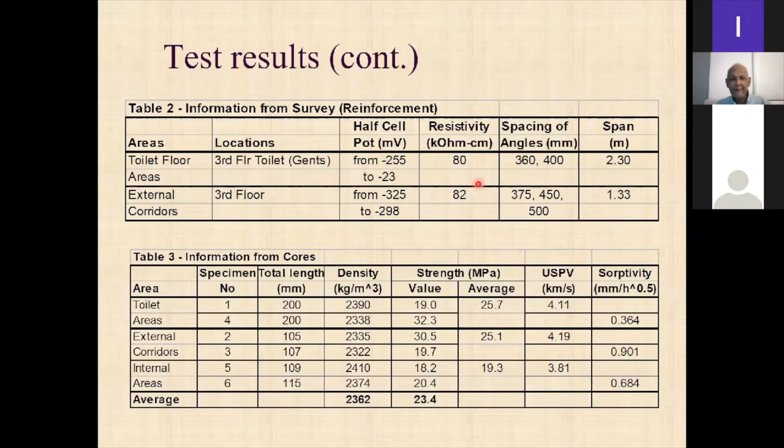So the findings: depth of carbonation exceeds the cover, and depth of carbonation is greater in dry areas. Now that is also something interesting about carbonation - structures will carbonate faster if it is dry. But if it is wet, then of course you will find conditions suitable for corrosion, because that moisture enables the formation of a corrosion component.

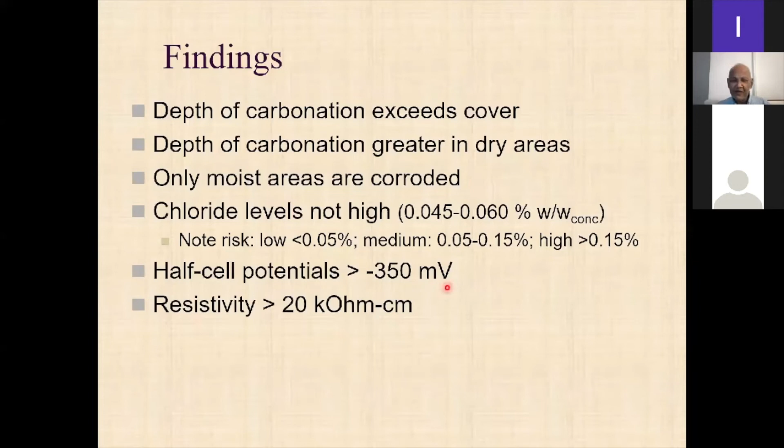Chloride levels are not high. Half cell potentials are greater than this minus 350, resistivity greater than this, and therefore basically we said, okay, you can still keep the structure.

I think this is the last section I have on fire damage. Sometimes it's a bit difficult to do these assessments. A lot of times you have to use some judgment. There is some guidance given in a Concrete Society technical report, which I may have mentioned here later on. But I will show you just some of the things that we have used.

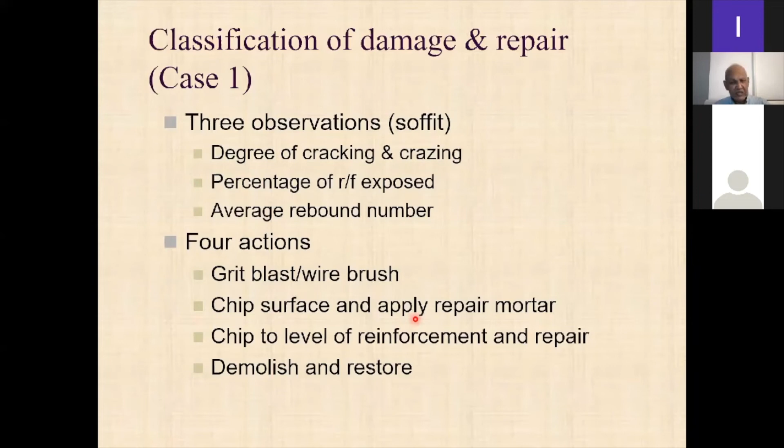Here you can get a visual idea about the degree of cracking and crazing. So this is medium and high. Percentage of reinforcement exposed, right, once again low, medium, and high. And this is the average rebound number. The rebound number gives an idea about whether there is likely to be spalling, because if it's a low rebound number, that means the slab is hollow.

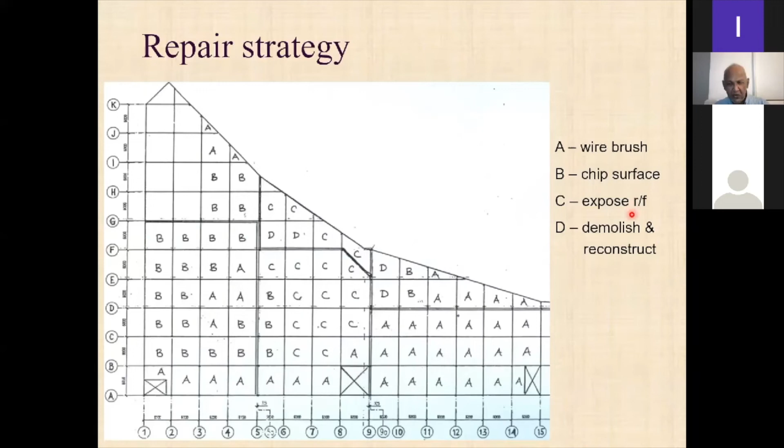This gives you some visuals. This is plaster crazing, this is actually concrete flaking. This is crazing in the concrete, and this is the concrete spalling. So you go from this, where only the plaster is affected, the concrete inside is okay. Here the concrete itself is crazing, meaning crazing is a lot of small fine cracks like this. Here the concrete has flaked off, and here the concrete has actually spalled off.

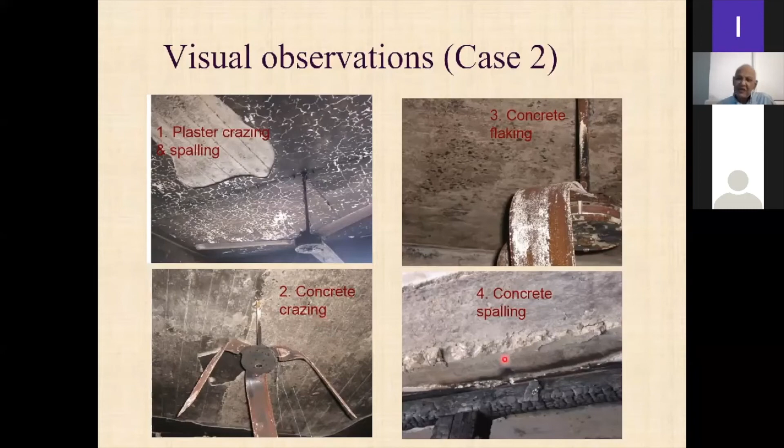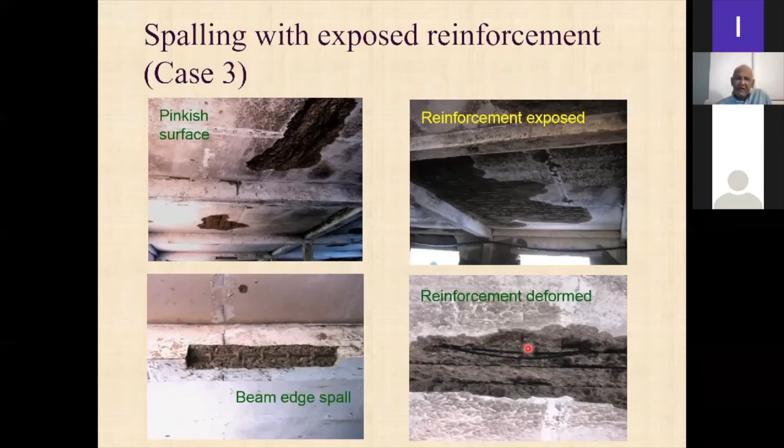So this is another case. Sometimes you get a pinkish surface. You have reinforcement exposed in a large area like this. Beam edge has spalled, and the reinforcement has deformed like this, probably because of the heating. The concrete has got chipped away. This reinforcement is trying to expand because of the heat, but it can't, and therefore it sort of bends like that. Okay, so these are some of these levels of damage and repair.

Given by this, right. Now, in this particular field, I have done some work in the past, and anything I said about the Eurocode is quite up to date. But some of these other things, there may be more recent versions of these technical reports, but the principles are similar.